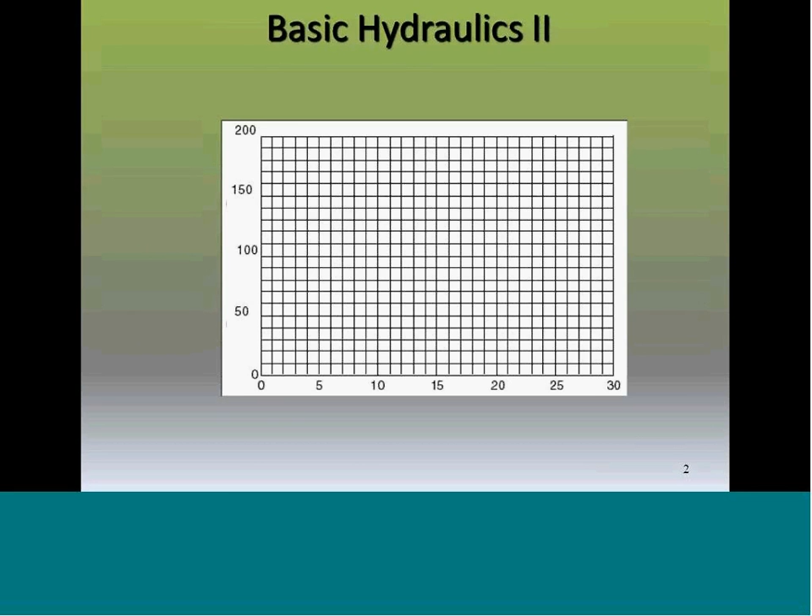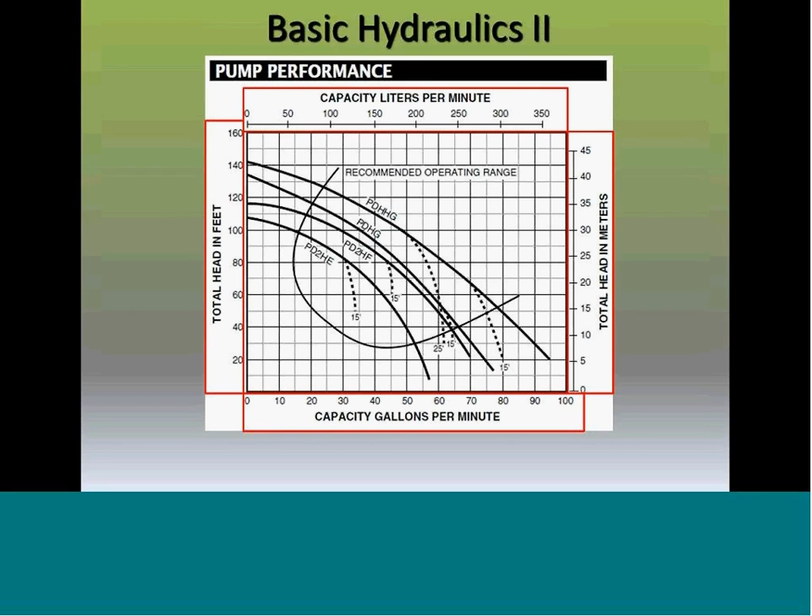Now, of course, how does the curve get produced? So what we're looking at here is a picture of a pump. On the suction side of the pump, two pipe diameters from the suction hole, we are going to put something called a combination gauge. There's a reason why we use a combination gauge, because it can read either pressure or vacuum. You can't have both, but you can have one or the other, and the combination gauge will read whichever one happens to be present at the time.

So we are using a flooded suction. Because we are using a flooded suction, there is the probability that we are going to have pressure, especially when we do our shutoff head test. From that point, we're going to go another 5 straight pipe diameters, for a total of 7 pipe diameters from that suction hole. So if my suction hole is a 3-inch hole, that means I'm going to go out 21 inches before I can do anything else. This allows for the water to get back in the middle of the pipe and gives us our best reading at our vacuum gauge.

On the discharge side of the pump, we're going to come out 2 pipe diameters and put a pressure gauge. This gauge is just reading pressure. Then we're going to go 5 more straight pipe diameters and put a flow meter. Someplace on the other side of the flow meter, we're going to put a valve, and that valve is there specifically to control the flow of the water going through the pump.

Now what's going to happen is, remember we're using a flooded suction, so we're going to flood the pump. Of course, everybody realizes what you have when you have a pump that's not primed, right? It's called a fan, because all you're doing is moving air around. So when you're flooding the suction there, now we're priming the pump. We turn the pump on, we get the water flowing through the pump, and then we're going to close the valve. When we close the valve, we're going to get a pressure reading right there at that pressure gauge on the discharge side.

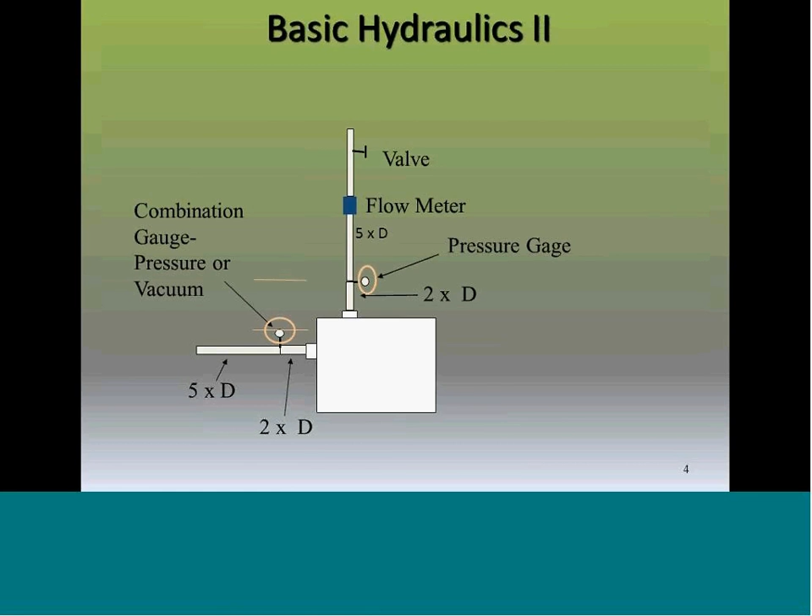Going back to our pump curve, at zero flow we put a point right there on our curve. Based on the numbers at the bottom of this particular curve, we'll do the test at 5 gallons a minute, 10 gallons, 15, 20, 25, and finally you'll notice at 29.5 gallons a minute and about 45 feet of head, the curve just stops.

If you remember, last time we talked about why this happens. It happens because with the impeller diameter we have, the RPMs we're spinning it at, and the port width of that impeller, that's all the water we can get through there. At that point, we've reached suction failure.

Now we're going to ask another question: can this pump do 15 gallons a minute at 150 feet of head? The obvious answer is no, because you just barely have 150 feet of head at shutoff.

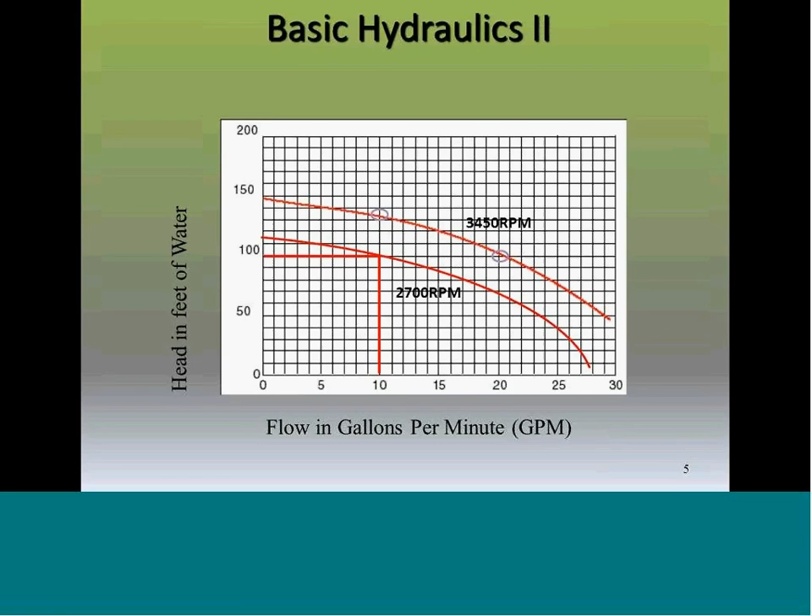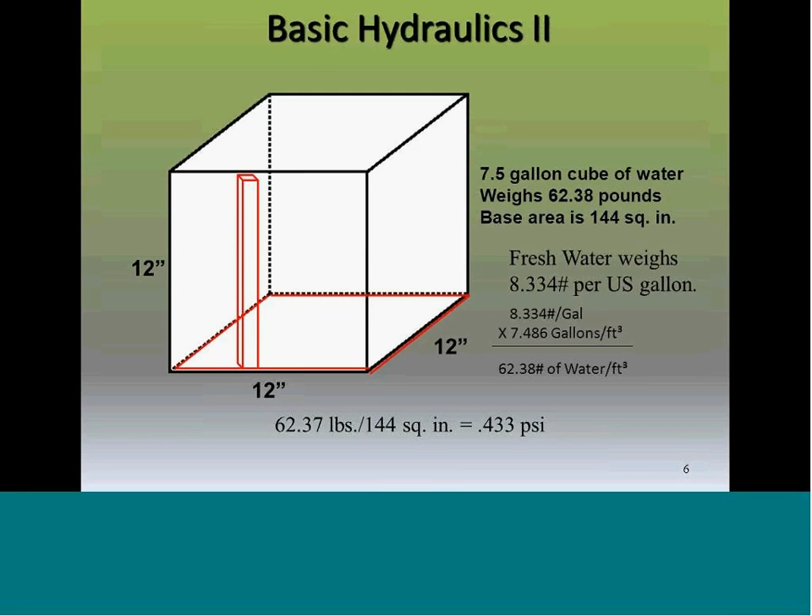So the question is, how do I calculate how high I have to go to get 1 pound of water? The answer is, you divide 1 pound by 0.433. When you do that, you come up with 27.69 inches, which if you divide by 12 is going to be 2.309, we'll round it off to 2.31 feet of head. So 2.31 feet of head equals 1 pound of water per square inch.

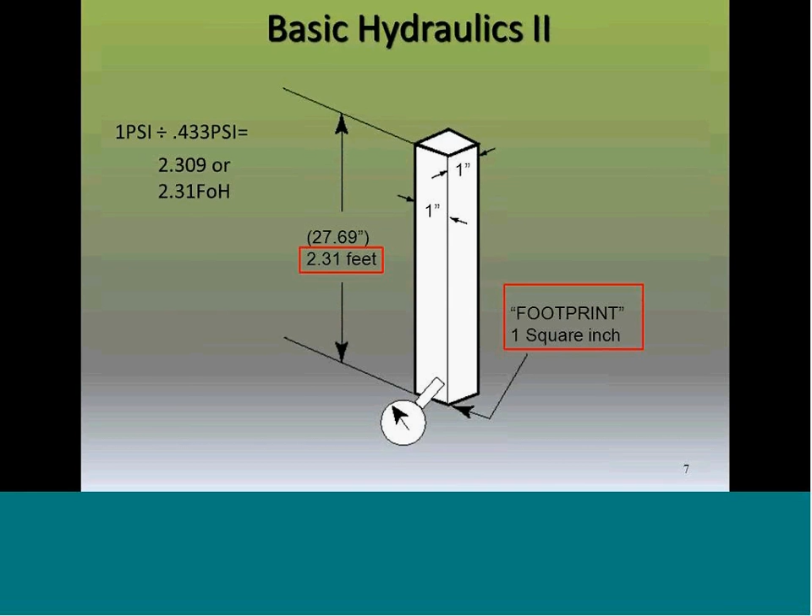That's our footprint, and those are the two numbers you need to remember: 2.31 feet of head equal a footprint of 1 square inch, 1 pound of water.

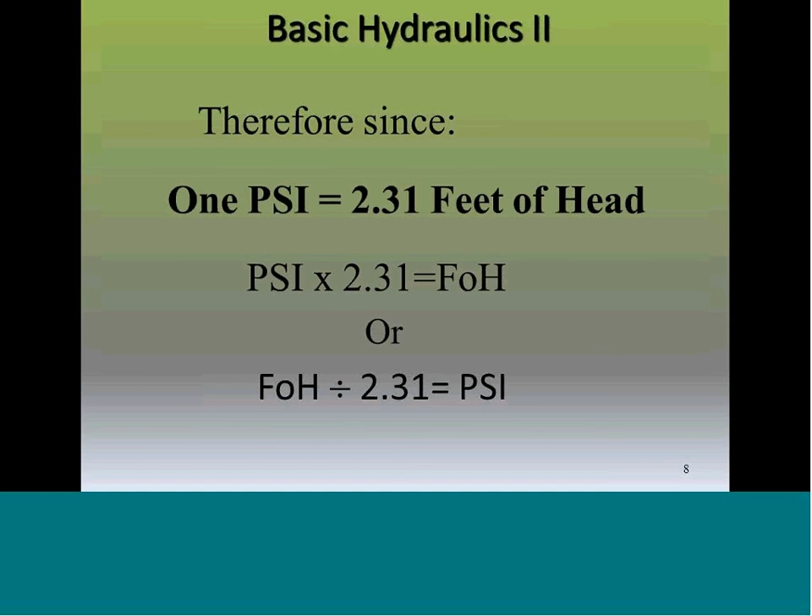So therefore, since 1 psi equals 2.31 feet of head, we can take our psi times 2.31 and get our feet of head, or we can take our feet of head, divide it by 2.31, and come up with our psi.

Now you're probably wondering, well, just where am I going to use this? So we're going to talk now about something called total dynamic head, TDH. TDH can mean total dynamic head, or it can mean total discharge head. Remember, head means the energy content required to accomplish the task we want to accomplish.

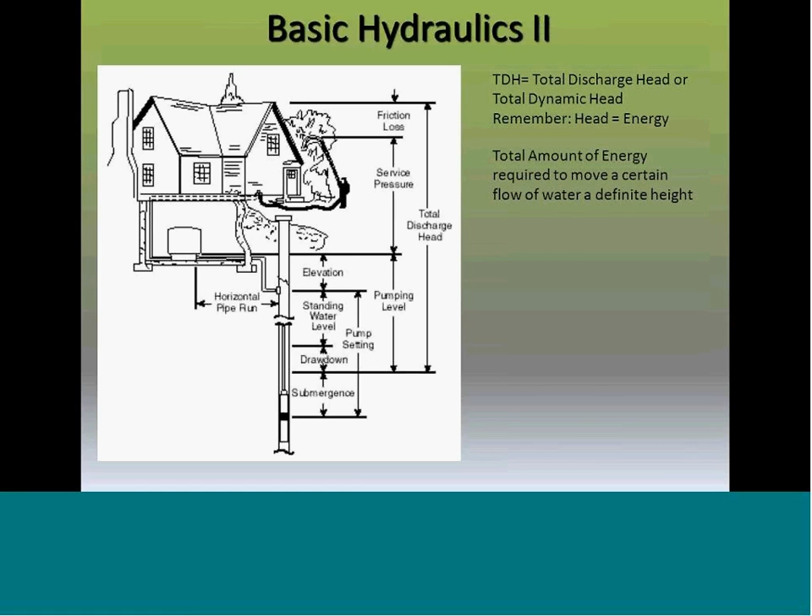So when we look at TDH, you're going to notice that we have a total amount of energy required to move a certain flow of water a definite height. That's what TDH is talking about. TDH is made up of 3 things.

Friction loss. We put friction loss up at the top of the page, up at the top of the picture, so that way you don't forget it. It's very important. Remember, the picture here is showing a submersible pump, but this could be submersible or above ground. The only difference is if it's an above ground pump, now we are also going to do friction loss on the suction side.

Right below friction loss, it uses the term service pressure. And I want you to notice where service pressure starts at. It starts at the pressure tank, and it is measured up from that pressure tank to the highest point that I need to get that water.

In our picture here, I've always kind of joked about, looks like that guy might be trying to get water on the top of his house before the fires in California consume his building. So that might not be what it is, but it gives you the point. The point is the water has to go so high. And that's what service pressure means, to have enough pressure to accomplish the task of getting the water up on top of the house.

Below service pressure, we come up with something that we're going to call pumping level. So total dynamic head or total discharge head is made up of 3 things: friction loss, service pressure, and pumping level. But I want you to know pumping level is also made up of 3 things.

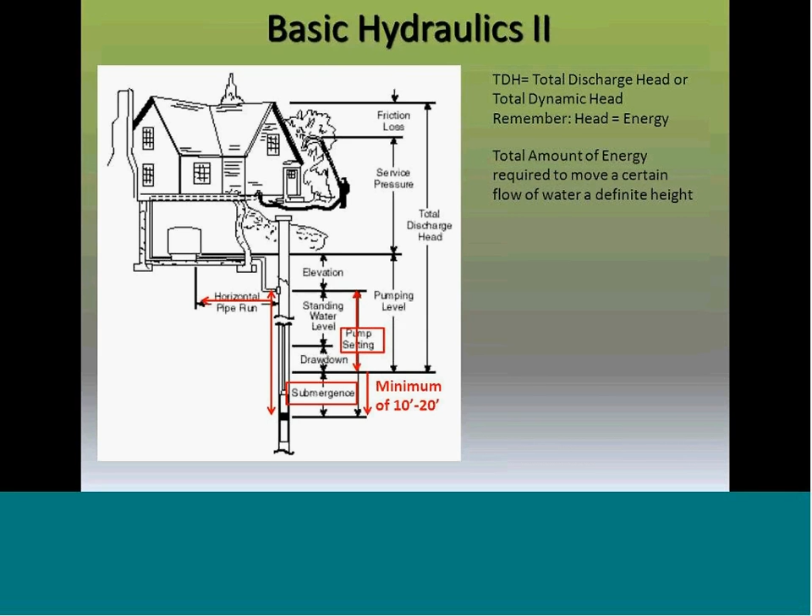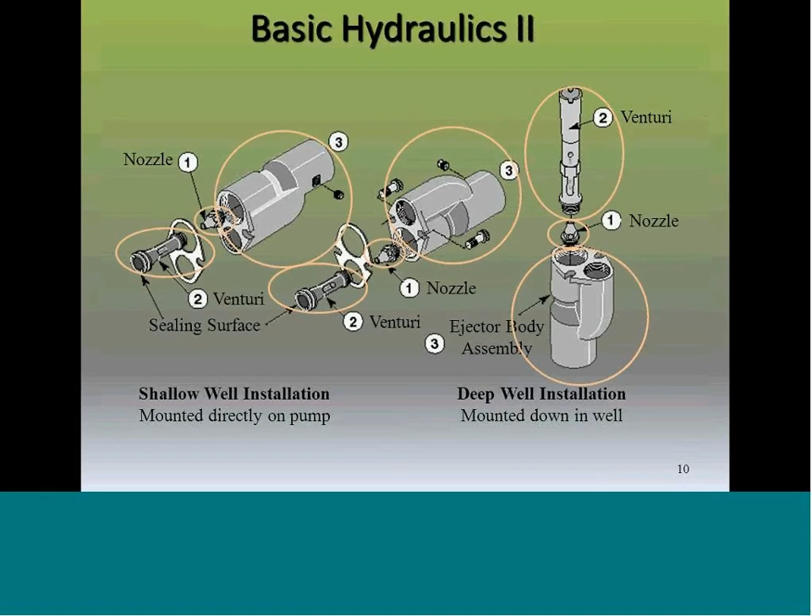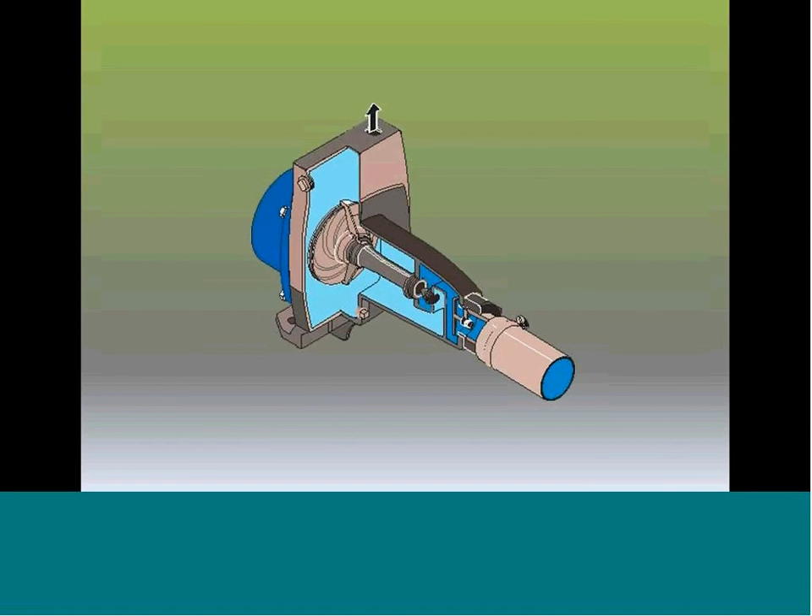So this is your designated shallow well pump where the jet is on the front of the pump. When you're looking at this jet, you'll see there is a discharge side to the pump, and if we look carefully, we'll also see there is a suction side. So there's a discharge chamber and a suction chamber, okay?

In the discharge chamber, we've got our impeller diffuser combination there. And what's going to happen is the water is going to come off of that impeller and go through the nozzle. You can see there is an entrance to the nozzle, and it happens to be in the discharge side of that chamber.

Now, of course, nozzle indicates that it's a conical shape. You can see there that the opening where the discharge water goes in is rather large, and where the water comes out is a rather small area. And so, as that water comes out, what's going to happen is we are going to wind up with a higher velocity. So we've got a certain amount of pressure going through the nozzle, going into the nozzle.

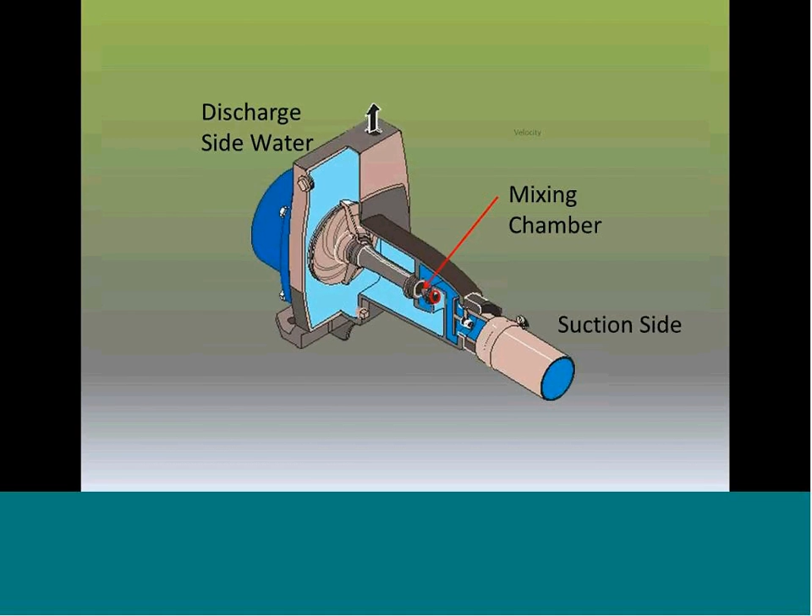And of course, as that water comes out, it comes out with a higher velocity. Now, last week when we talked, we mentioned the idea of a nozzle, of velocity and pressure. And we're going to call this the mixing chamber, because as that high velocity water comes out, remember, as the velocity goes up, the pressure comes down. So we get this high velocity, low pressure water there, and that's what's actually going to pull water through the suction and into the mixing chamber.

Now, as that water comes into the mixing chamber, we're going to mix the high velocity water with the well water. And as we do this, we're going to send it through the Venturi tube. As it goes through that Venturi tube, it's going to go into the impeller, and as it comes off the impeller, now it's going to either go out the discharge or it's going to find its way back into that nozzle. So there is a certain restriction that gives us pressure in that pump, so that way we can have enough pressure going through the nozzle to create the low pressure necessary to pull the water up. Okay?

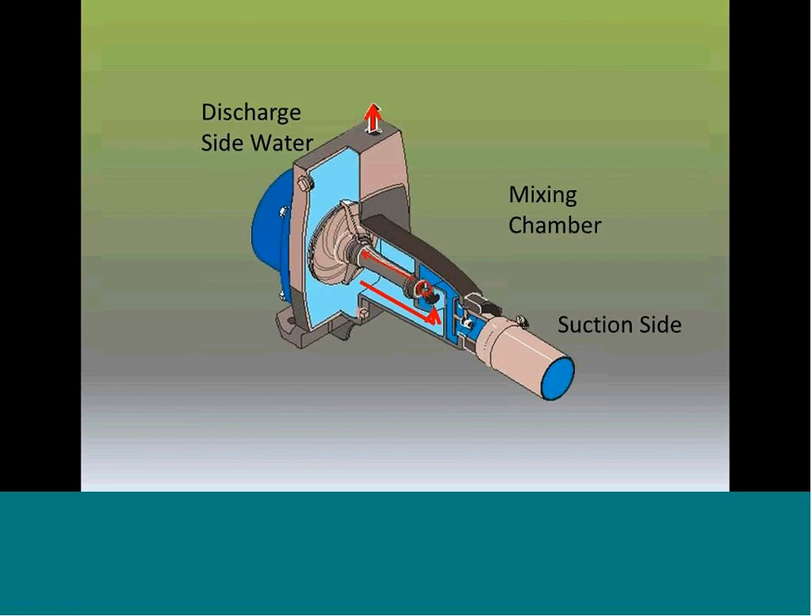When we look at this next slide, it shows us a picture of a shallow well application. Now, it's very important, and we're going to get rid of this one picture. It's very important that you understand there's two wells there. So we're going to hide the one and just talk about the other. The other well that we're looking at there is called a driven point well.

There is a water table. You can see we just put that line in there for the water table. And you need to remember that the point needs to be below the water table. If the point is not below the water table, you're going to wind up pulling air in, and you're going to really have a hard time priming that pump, if you can get it primed at all.

So there's something called a drive coupling that goes on the end of the point. You're going to take a hammer and you're going to pound that down in the ground. Once you get the point far enough in the ground, you're going to connect another piece of pipe to this coupling, and you're going to put another drive coupling on, and you're going to drive it down some more. Of course, as you do that, you have to remember you have to use steel pipe. It's really hard to pound on plastic pipe and keep it together. So make sure that you're using steel pipe when you're going to use a driven point well.

All right? There is going to be a check valve in the system also. The check valve is going to be out of the well. It is illegal to put a check valve in the ground. So it's going to be out of the well. You need to check with your local codes to see how far that check valve has to be out of the well vertically. All right?

The reason that you want to get this check valve as close to the well as possible, however, is for priming purposes. You have to remember that from the check valve to the water surface is air, and that air has to be evacuated through the pump before the pump is going to prime. So, of course, the closer you can get the check valve, the better, the easier the pump is going to prime. All right? Now, we're going to get rid of that.

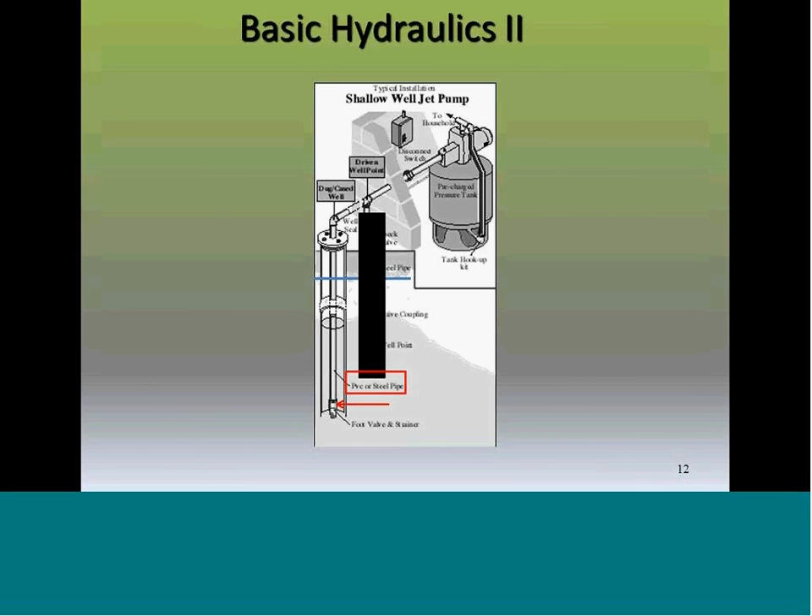Now, this is your deep well application. So that was a shallow well. Remember, shallow well, 25 feet to water. This is your deep well application. As you can see with your deep well application, the picture on the left, you're going to actually be sending water down that drive pipe.

The center picture shows you that as that water goes through the nozzle area, you're going to find the nozzle increasing the velocity of that water, and that's going to open that foot valve and encourage the well water to flow in. And then, of course, in the last picture on the right-hand side there, you can see that water is now going to go up through the Venturi tube, and as it does, it's going to slow down. When it slows down, we're going to convert that high-velocity water into high-pressure water.

Now, you have to remember, these were invented back in the 1930s. It gave people an opportunity to draw water from 100, 120 feet. Prior to that, they could only get water from 25 feet, so this really was a huge improvement.

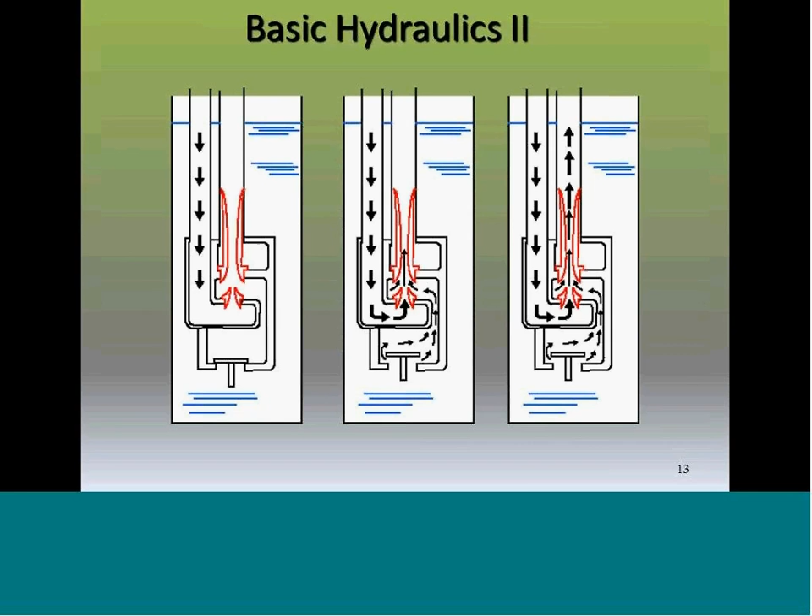When we look at this next picture, it is going to be a deep well application. Remember, deep well application can mean anywhere from 25 to 120 feet. The first thing we're going to do is get rid of one of the wells, that drilled well there, the 4-inch well.

And we're going to work with what we call a single pipe. A single pipe system actually uses a 2 or 3-inch well, so they're only going to be used for 2 or 3-inch wells when you're talking single pipe. Single pipe application also means we are going to use a special adapter on the top of the well, and what that adapter does is divert the drive water right down the well itself. So we'll use the well pipe as the drive pipe, and drive the water down on the outside of the suction pipe.

Then the water will go down through the hole in the jet body into the Venturi tube, back up through the Venturi tube, and then out, and as it does that, we're going to bring water back up.

Now, once again, I'm going to strongly encourage you to use steel pipe when you're doing a single pipe application. The reason being is at the bottom of that well, you are putting a 2 or 3-inch jet. That jet has leathers in them, and the leathers are going to actually plug the well. So if you don't use steel pipe, when you go to pull that jet out, you might have a difficult time.

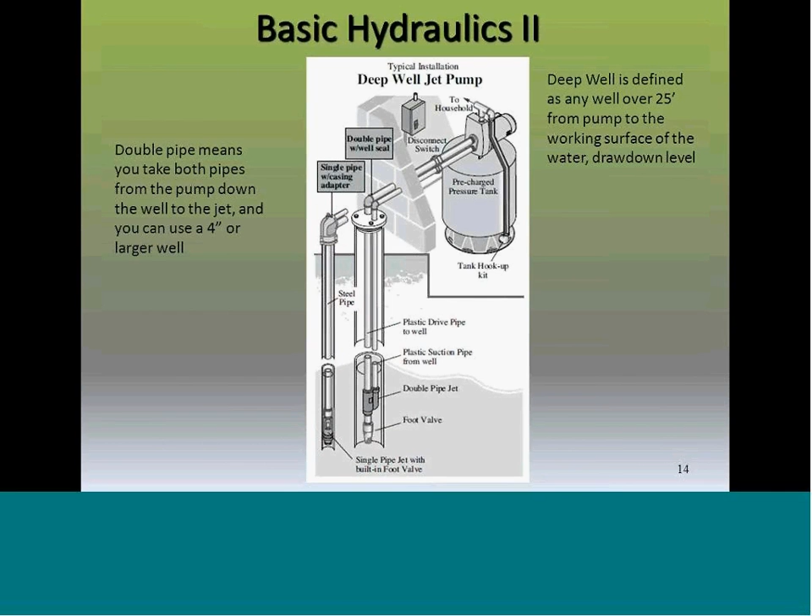You can, of course, go to a lake or a pond, any open body of water, because you are using 2 pipes to go all the way to the jet, which means you have a totally enclosed system here now. So what we're going to see is we've got our jet down the well, 2 pipes going all the way down to that jet. Those pipes at this point can be steel or they can be plastic. It doesn't really matter.

On the bottom of that jet, you're going to have a foot valve, and you're going to hook that drive water right directly up to that jet. Now what's going to happen is we're going to pump water down the drive water, and then we're going to pump it back up through the suction.

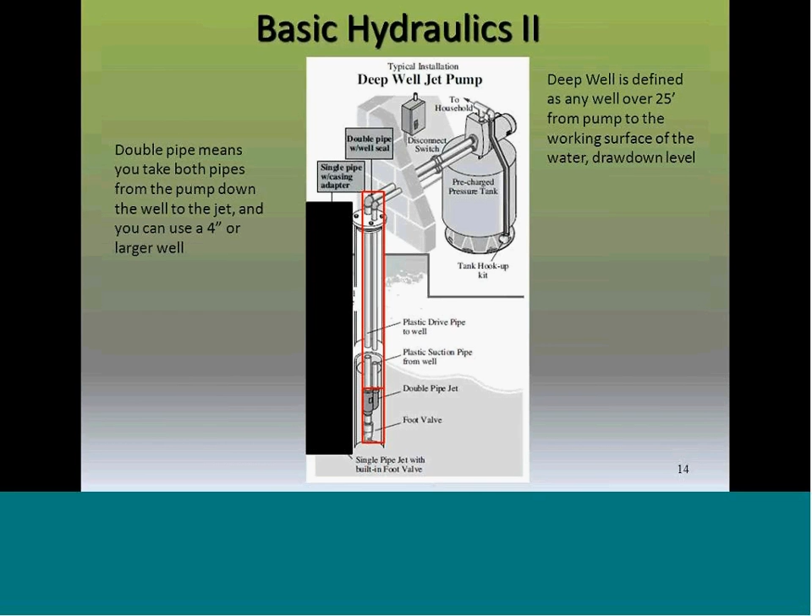Remember, jets are only good up to about 120 feet. But there is something we can do, if necessary, so that we can use something deeper than that.

So if we're living in an area where our water table tends to fluctuate, you can put in something called a tailpipe. A tailpipe is a 35-foot length of pipe that's put on the bottom of the jet. It needs to be atmosphere proof, so make sure you've got a nice solid piece of pipe. If you're connecting two pieces together, make sure there's a good tight connection with no air leaks.

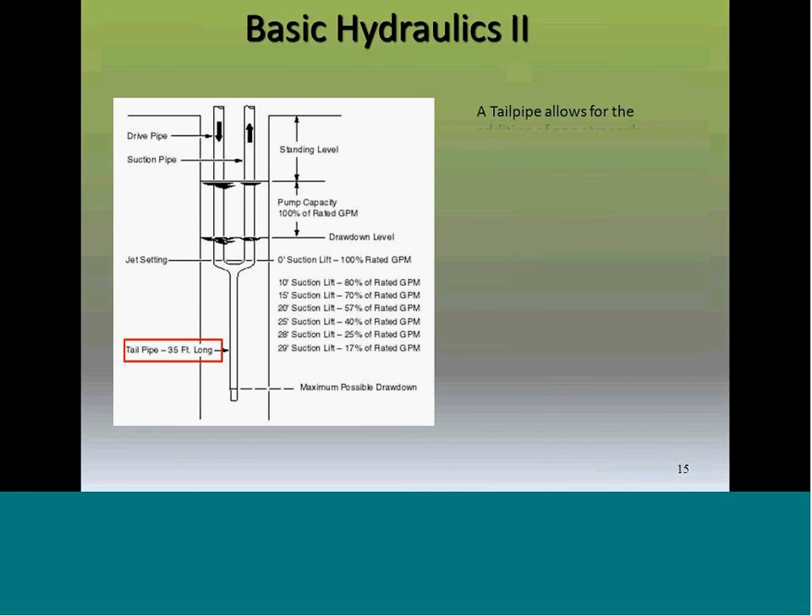What that does for you is a couple things. A tailpipe allows for the addition of one additional atmosphere. Remember, an atmosphere is 14.7 psi, 33.9 feet of head. So you've just given the jet the ability to go down another 25 to 30 feet.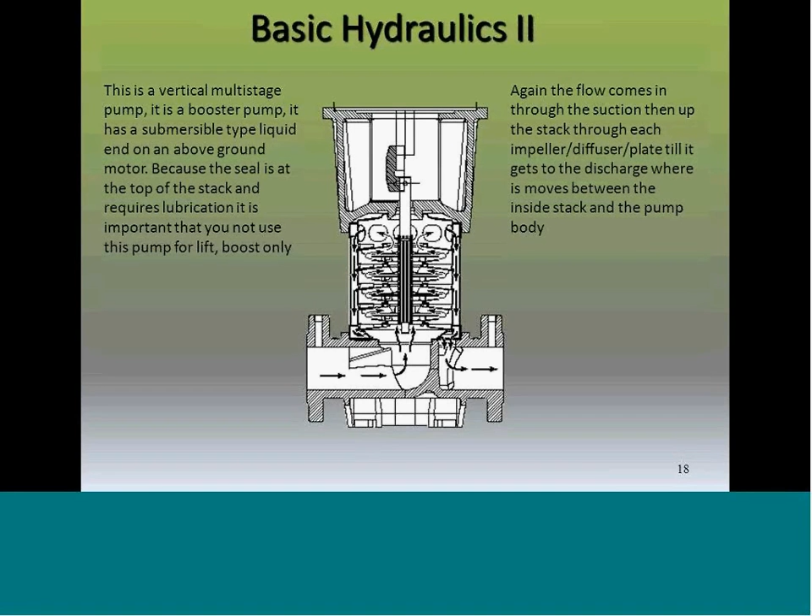Now, deep space is about 326 miles above the Earth, depending on where you're at. So he gets up in deep space. If he was to go out into that space shuttle there, and he was just dressed in street clothes, and he said, open the shuttle bay doors, he'd be dead, because the void of space doesn't like atmosphere. We've got atmosphere in our body, and so it would pull all the atmosphere out of our body, and we'd be dead. He, of course, knows this, so he puts on his spacesuit.

Now when he goes out there and says, open the shuttle bay doors, when those doors open up, the void of space comes in on him again, but it can't get to him because he's wearing his spacesuit. Now, down there on Earth, we are protected also from that void of space. If we weren't, we'd all be dead. Since we're not dead, there's something protecting us, and what's protecting us is the atmosphere.

As I mentioned earlier, the atmosphere actually goes up 326 miles at the equator. And so, you get away from the equator, it doesn't go up quite so far. There are 5 layers to the atmosphere. The area that we live in, or walk around here on Earth, is called the troposphere. The troposphere goes up about 40,000 feet. This is why when jets fly, they have these great big scoops on their engines so that they can collect as much oxygen that's up there. Remember, the further up you go, the less atmosphere there is. We talked about that last time.

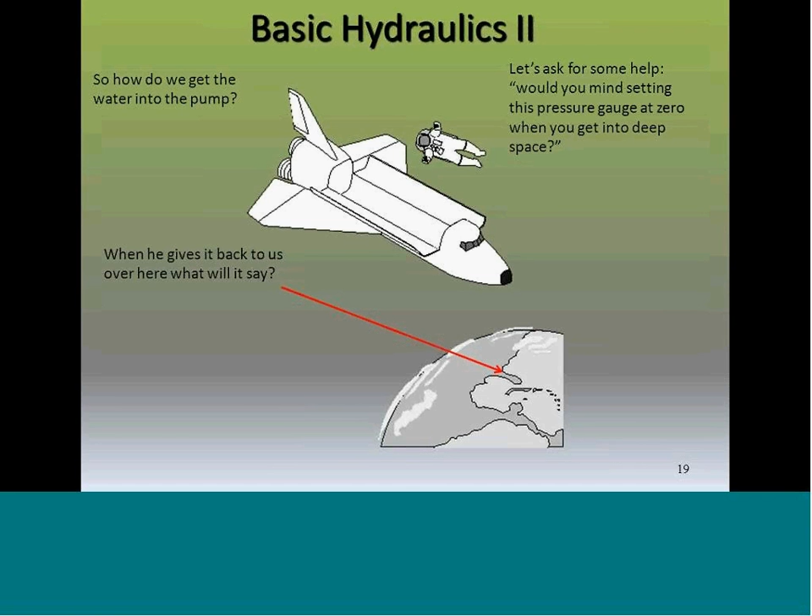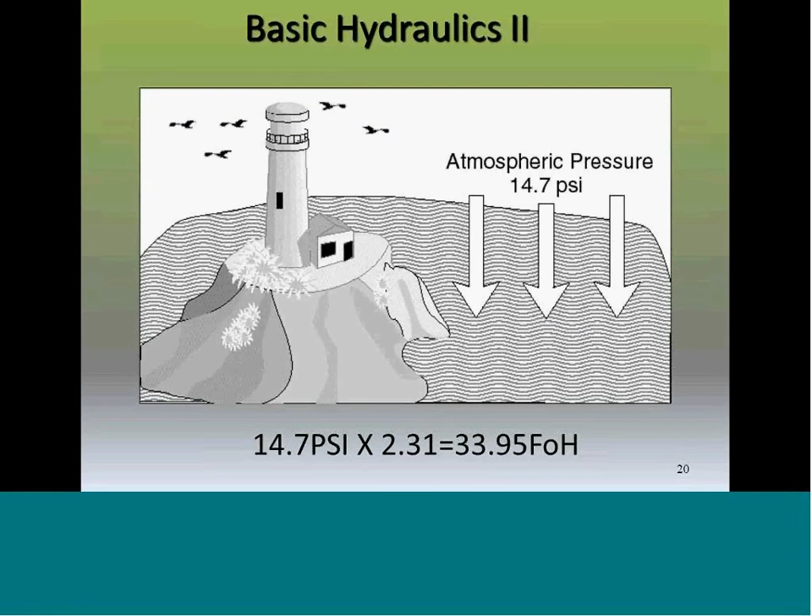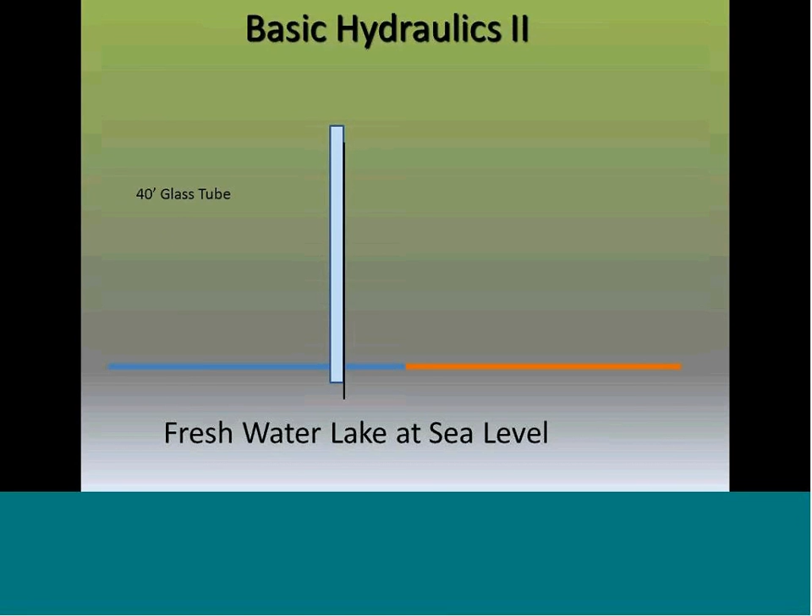When we turn the vacuum pump on, it's going to evacuate the atmosphere out of the tube. As it does so, water is going to start going up the tube. The question is, how far does the water go up the tube? And the answer is, in a perfect world, 33.9 feet, because that's the maximum the atmosphere is pushing down. So you can only go up as high as the atmosphere is pushing down.

In reality, it'd only be about 33 feet, because you have to remember that all water, no matter what the temperature is, has a flash point where that water will convert from a liquid to a vapor. The flash point for 70-degree water is about 33 feet. So when you get about 33 feet of water, it's going to flash from a liquid to a vapor. You're going to notice here that the last 7 feet will remain vacuum. They cannot be filled.

So that's with a vacuum pump, but the question is, what kind of pumps do I make? I make centrifugal pumps. So the question is, how much lift do most people or most pump companies say you're going to get with a centrifugal pump? And the answer is 25 feet. So while a vacuum pump can lift water almost 33 feet, a centrifugal pump you limit it to about 25. And depending on the engineer you talk to, you may even go up to 30.

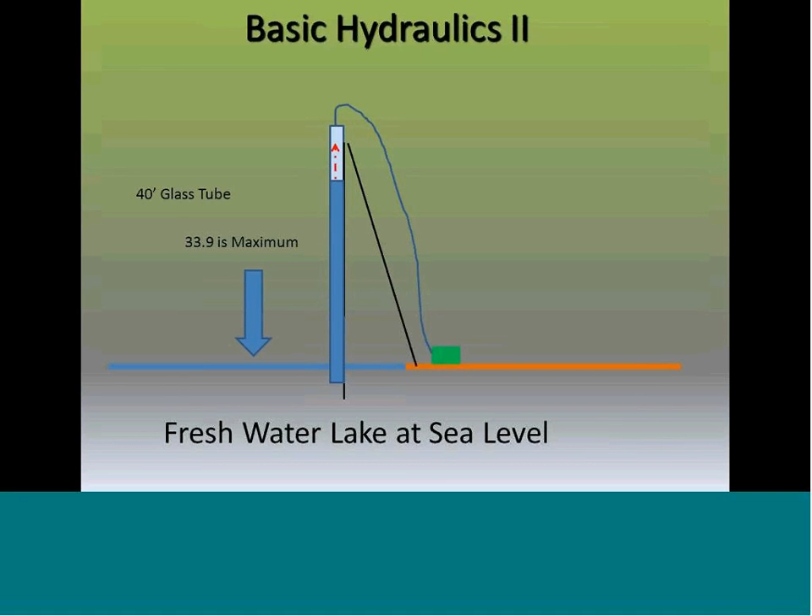Okay? So, how does it all work? Well, basically, remember, with our centrifugal pump, we have a very small area right there at the eye of the impeller that we're forcing the water to move through. As the water moves away from that area, it creates a vacuum. Remember, we've got atmospheric pressure pushing down the water, and it says, I'm going to fill that vacuum by pushing the water up to me.

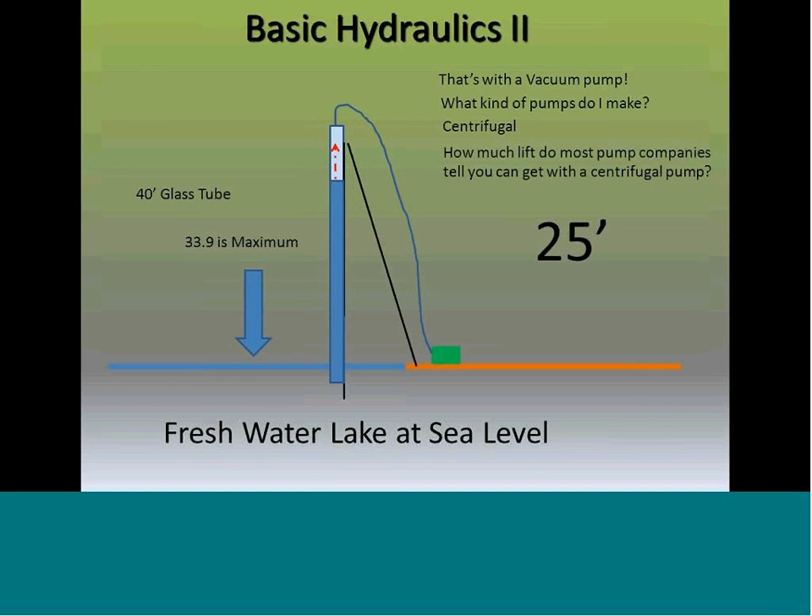As long as I've got enough atmospheric pressure, and as long as I'm creating a good enough vacuum, I will get the water to move from where it is to my pump, and I'll keep it moving that way.

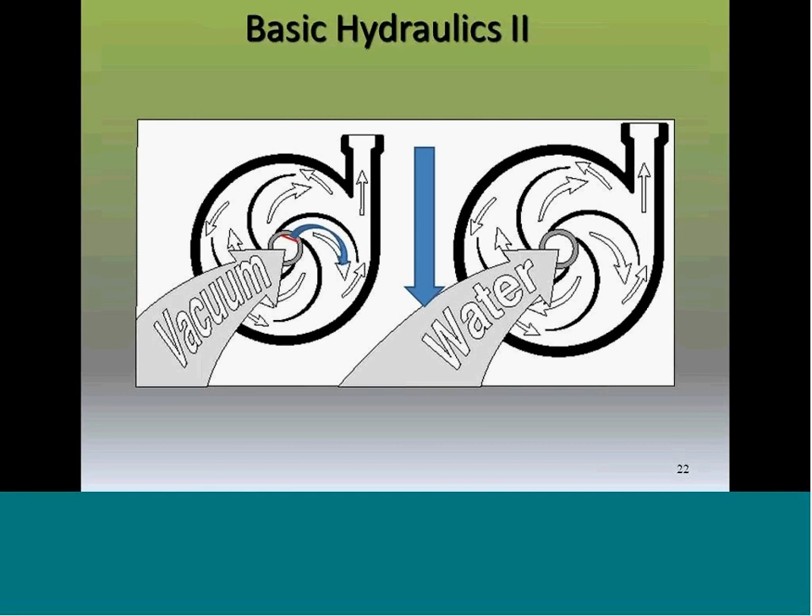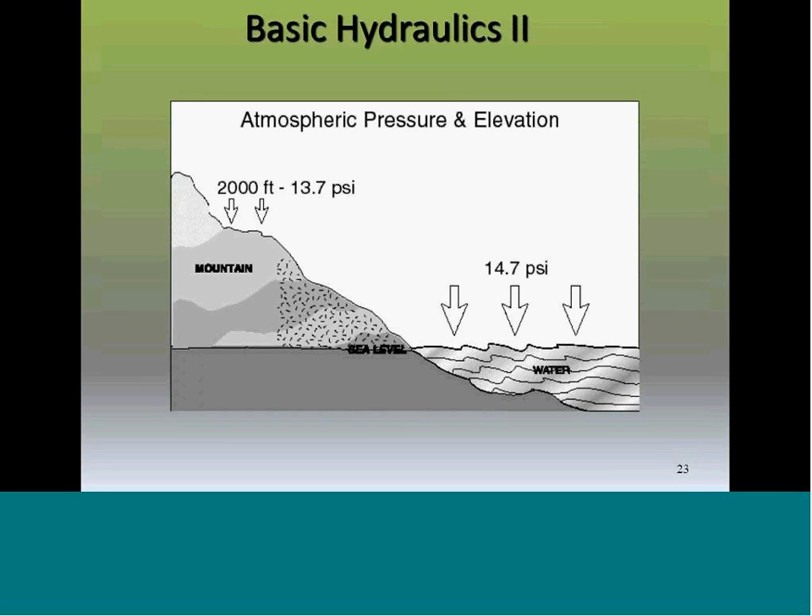If we were at Denver, remember Denver is 5,280 feet above sea level. So at 5,280 feet above sea level, you're going to see that we have a little over 12 psi pushing down on us. That's going to be important when we get into our advanced hydraulics, so don't forget that number.

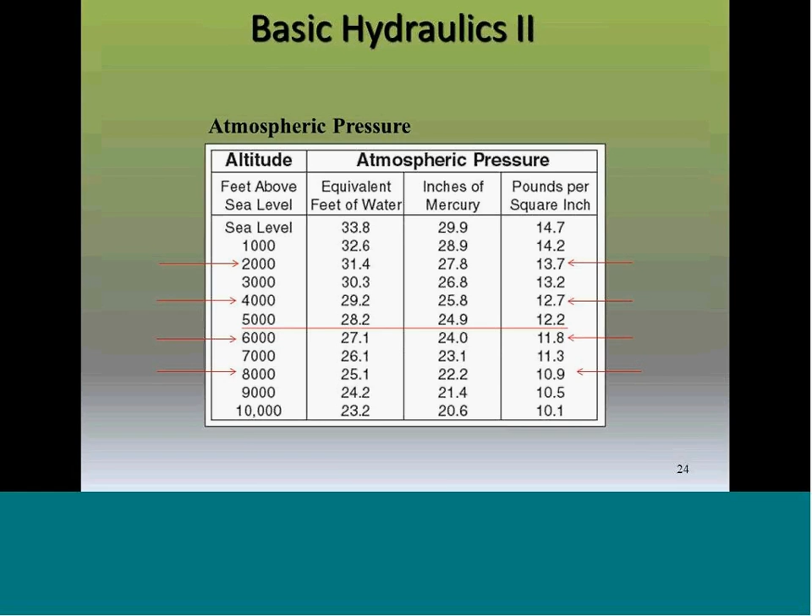So when someone mentions the word lift, they're talking about the suction side of the pump. When they mention the word elevation, they're talking about the discharge side of the pump. And don't forget, horizontal run really means how many linear feet of pipe there are from my point of usage to my pump, so we can calculate all the friction loss required.

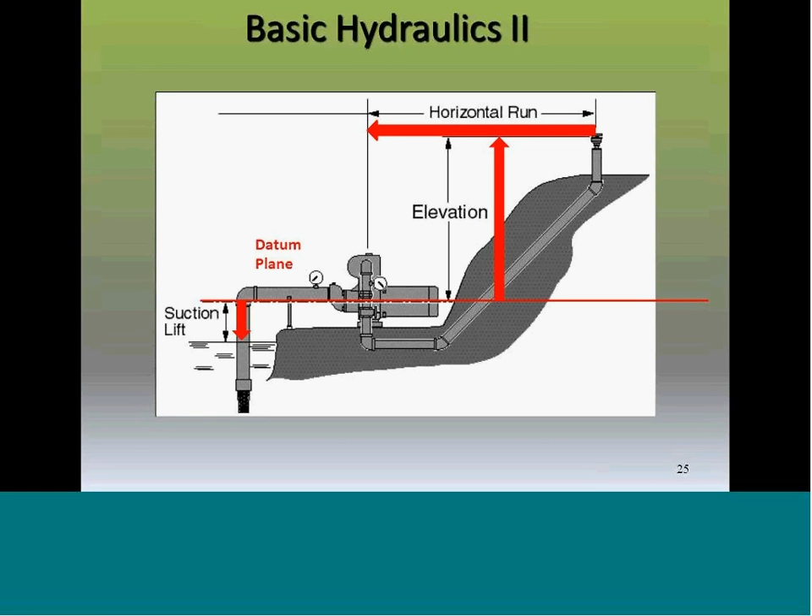Now you have to start looking on the discharge side of the pump. Is there a broken main line? Is there a plugged main line? Did one zone not close all the way, so now we're getting two zones turned on at once? That will keep that second zone from getting all the pressure required to give you the radius you want. So those are things to look at when the pressure gauge is saying what it's supposed to say. If the pressure gauge is not saying what it's supposed to say, then we know we got to look at the other area, which could be the pump.

Now, of course, there's also a suction side, so we want to make sure we've got that gauge in there. Remember, it's a combination gauge if I have a flooded suction. This picture shows a suction lift, meaning there's no flooded suction, so if I really wanted to, I could use a vacuum gauge there. The vacuum gauge is going to tell me exactly how far off the water I am, and that's why it's important to have that gauge there.

Don't forget, it is imperative that you support that suction pipe. If you do not have that suction pipe supported, with the length of the pipe and the weight of the water in it, and that water fluctuating a little bit, you can get that pipe to bounce up and down, and you're going to get things to break that you don't want to break.

Remember also a minimum of 6 pipe diameters. The Hydraulic Institute said 7, but we're going to cut you a little slack here and say at least 6. Keep the pump as close to the water vertically as possible—this makes the pump work easier, as we saw in the last presentation. The pump is going to work easier when it's vertically closer to the water. And once you get under the water, you want that suction to be at least 6 times the pipe diameter beneath the surface of the water.

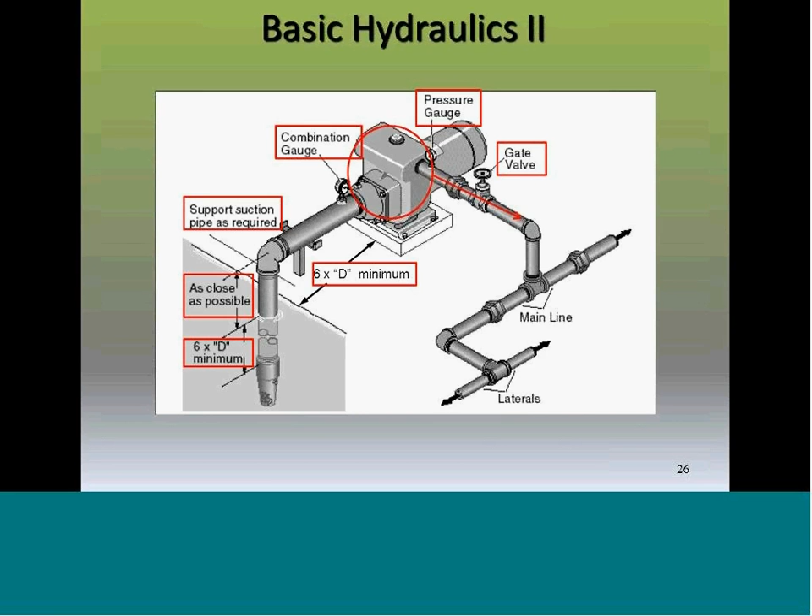A lot of guys today use PVC pipe. As a matter of fact, some of them use that black plastic pipe. Whatever pipe you choose to use, you can use whatever you want. The key to remember is that most guys are going to tape that electric wire to the pipe. Whether it's plastic, whether it's steel, whether it's PVC, whatever it is, they're going to tape that cable to the pipe so that it doesn't get nicked. That's the whole purpose of it, to keep that wire close to the pipe so it doesn't get nicked.

However, there's another problem that can happen, and that's if you do not put a torque arrestor in play, you can get that plastic pipe to slap up against the well casing. And of course, if it slaps up against the well casing where that cable is taped right to the pipe, it's going to break that cable. And that's going to be another very difficult problem for you. So to prevent that from happening, make sure that you put a torque arrestor in there.

I really need to suggest that you use centering guides. I know that most professionals don't use them, but what the centering guides do is replace the tape. They keep that cable close to the pipe, and they also keep the pipe from slapping up against the well casing. So they are a very good value if you want to use them. Of course, one of the reasons why guys don't like to use them is they want to use that sonar gun, and it's kind of hard when you've got plates in the way to get an accurate reading on your sonar gun.